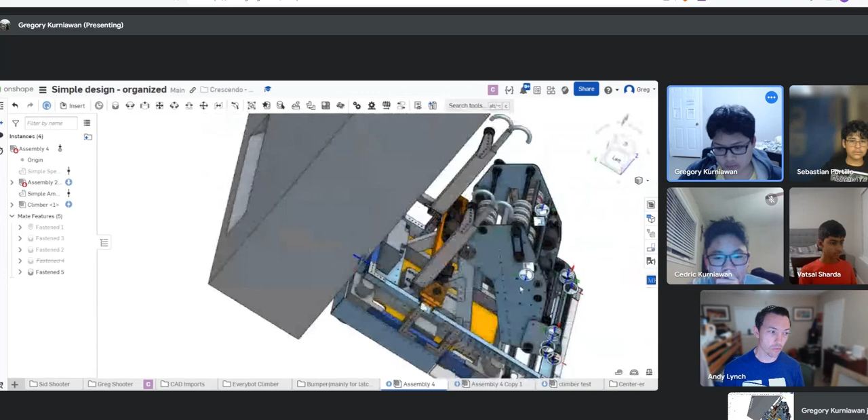I think so. Maybe bumpers, that's it. I did the bumpers thing on the assembly 4 copy 1, I just forgot to move it into my folder.

Okay yeah, give me a second, my computer's not happy with me. It's okay, the bumper stuff is in right now, it's just got most of the sections left. That's fine, yeah.

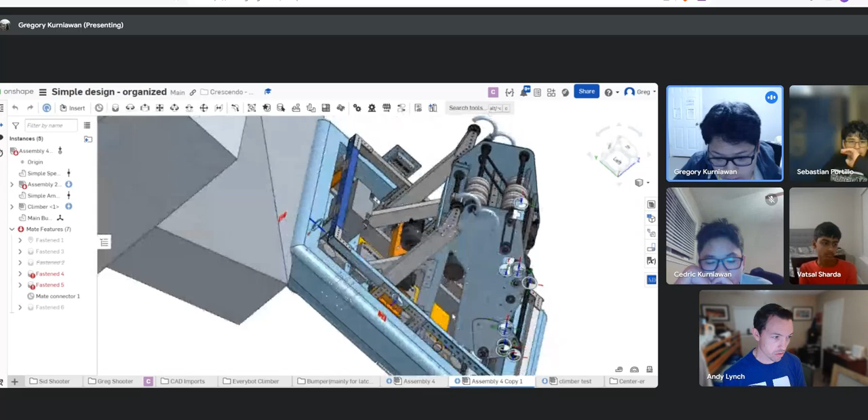I'm sure we can use this, it's okay, I think it imports everything too. That's fine, okay, here it is. Here's the fun part, okay.

I guess we'll start with the shooter. Well, we'll start with the intake because it's changed a little bit, the intake stuff. Okay, this one's easier to look at.

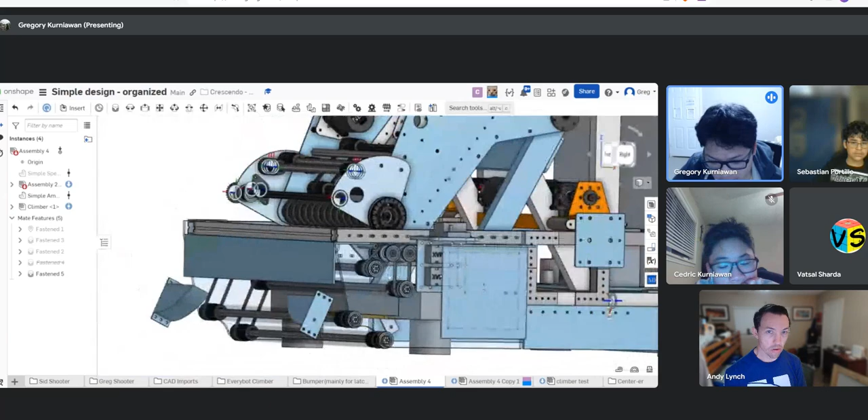So in order to accommodate the shooter, I moved the motor down a little bit. We had this CADed out already before, so we just moved it down, and there's a new plate, a new gearbox plate, and a new

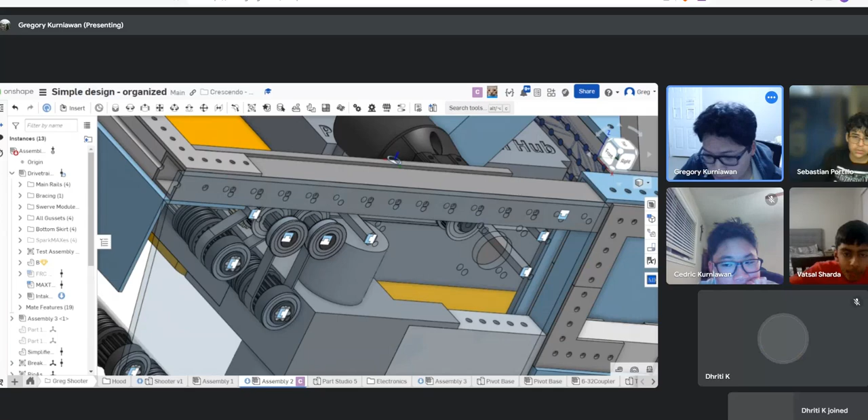intake plate. Actually, I think it's the same intake plate. Oh no, it's a different intake plate because of the different motor hole position and the different standoffs. This doesn't really need to be here though, so we can just use the old ones and put holes in it. If we want to, we just have to cut this part and this new part out.

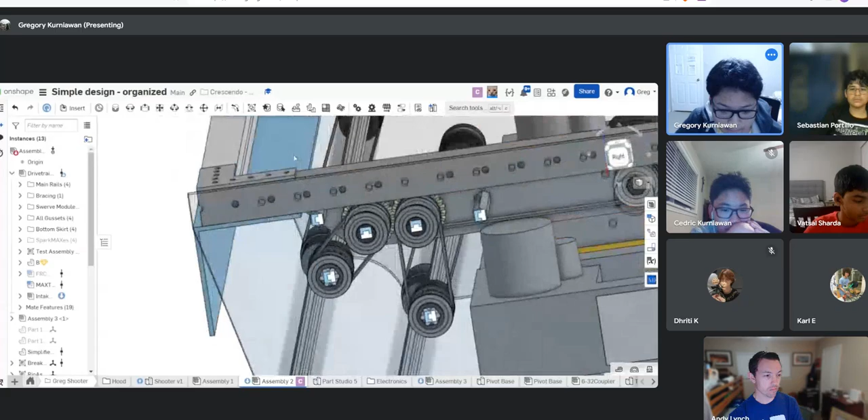Oh, I didn't catch this though. Yeah, and that's just to make the shooter part stuff work, because with the old intake, every time I tried to put the shooter in position it would always hit the motor no matter what. So yeah, no, it fits right in between there. Okay.

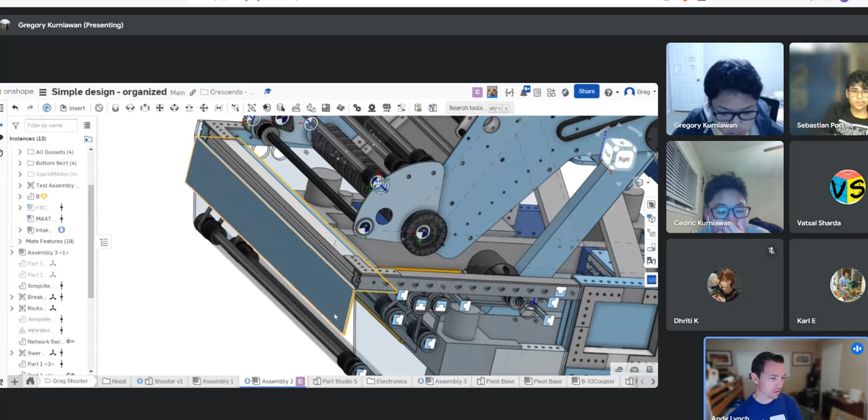Oh, did they? Because I don't think any of the pictures show a top down, so I didn't really know. I just kept it at 3x3. Let me see, let's look at it this way. We will, yeah, okay.

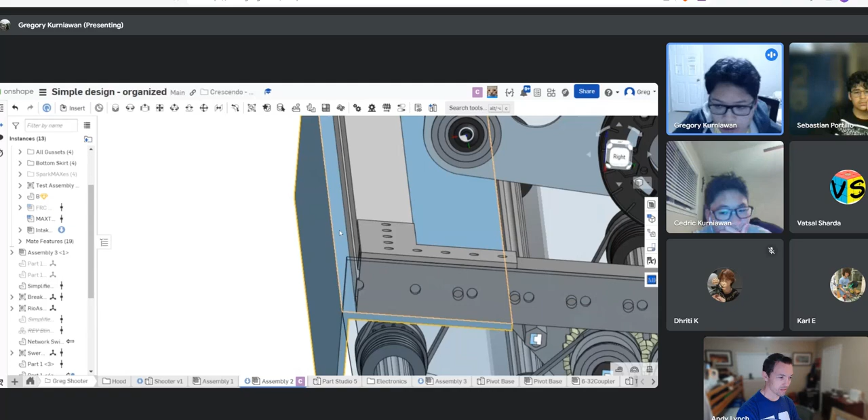Yeah, I think we went off of what we have for the intake part, we went off of what we have right now in terms of where we're putting the plate and stuff. We don't have to adjust that intake thing with the 3x3. Just got the 3x3, okay, yeah.

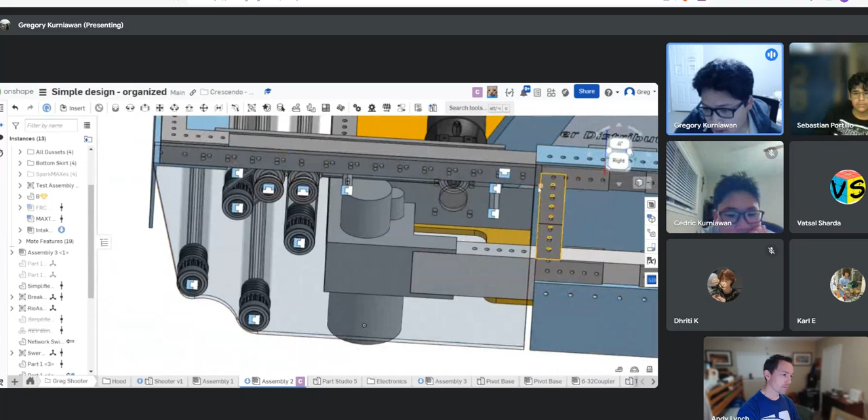Yeah, because the old one still has this gap, because the current drivetrain has this little gap here, right? So that's where we're at right now. We can always move it and change it and stuff, so it's fine.

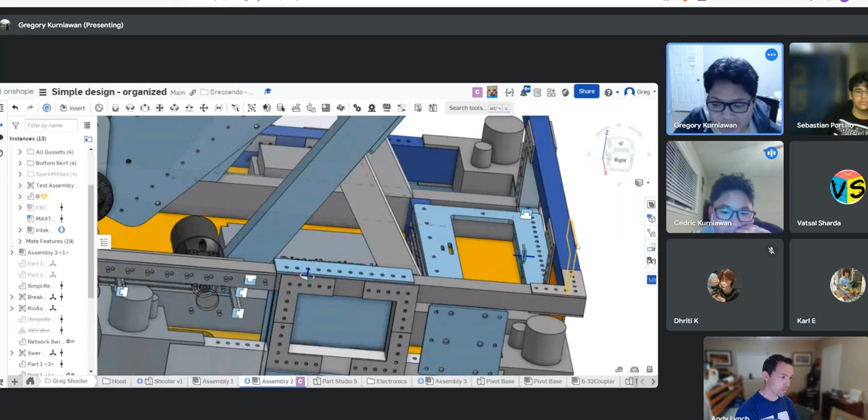Cedric, you going? You did other stuff, right? Yeah, I tried to make development on electronics. It hasn't been going great, truth be told, but essentially I didn't know that the navX was going to be on top of the Rio beforehand, but if you look on the plate to the side, that's what I think the mentors are trying to say about mounting the Rio to the side on a plate.

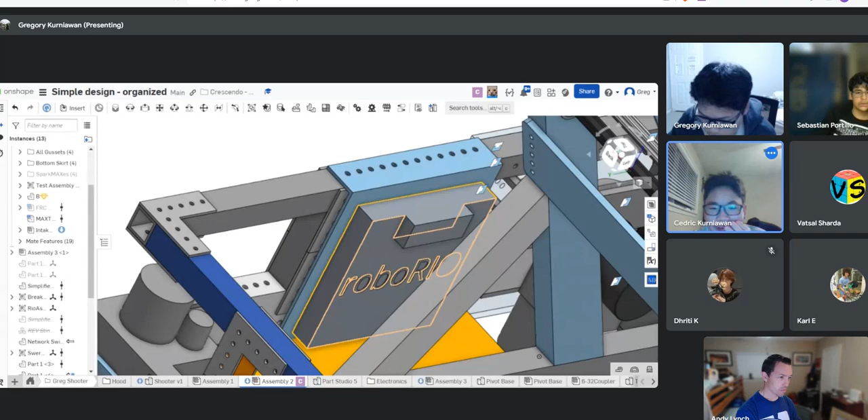So I tried to do that, but I was told that the navX was going to be on the Rio and it had to be flat, so this may be abandoned, but that's the current situation on that. And then with the rest of the electronics, I also made new motor mounts, Spark Max mounts for our drivetrain. That's the old one that's still in there, I haven't put them in yet.

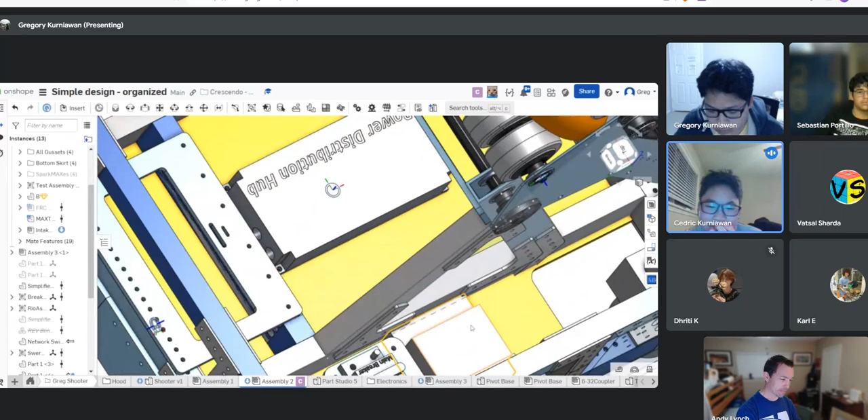I was struggling, okay, but yeah, those are aligned with the Max pattern, so it's gonna be easy to just screw in straight into the drive rails or wherever we need it really. And I'm thinking for electronics to either do it on the brace, like where that small little plate is, or put it on like the inside face of the bracing, like in the past. So yeah, but that's where my mind is at right now, but I haven't made a full-on decision yet, or 100%.

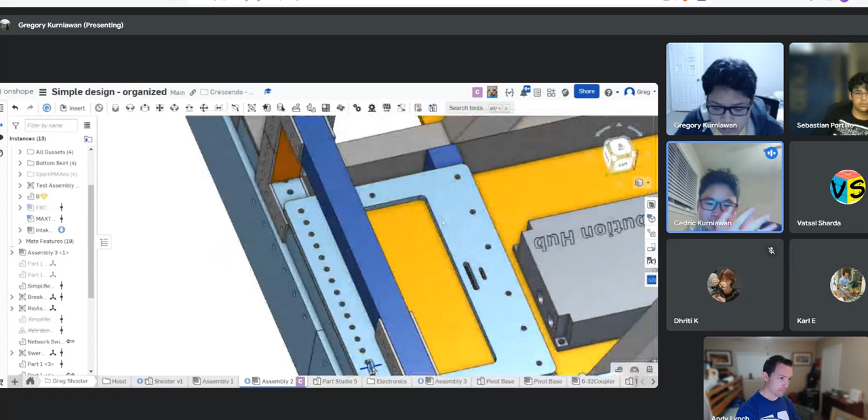I also did realize at this point I don't know why I went and designed and cut a whole battery mount where we could probably just use the AndyMark battery mount, considering we're using their whole strap system, we may as well just use their battery mount. So I also considered trying to do that.

You want to show it? If I can find it. Right now, okay. Okay, you're happy with the sketch? I mean, I think it's okay.

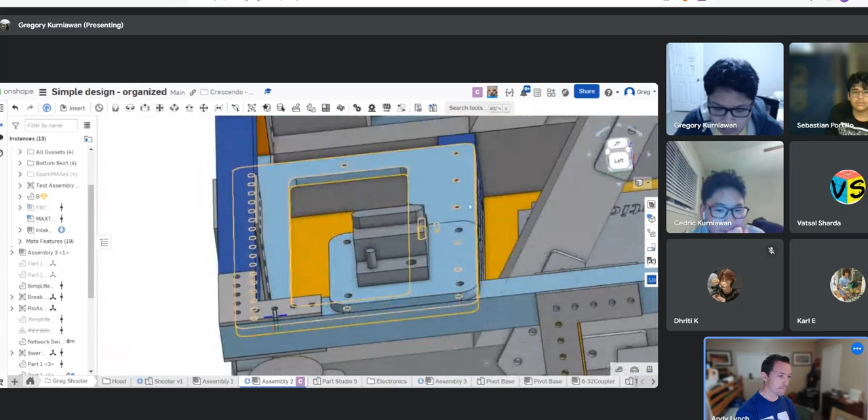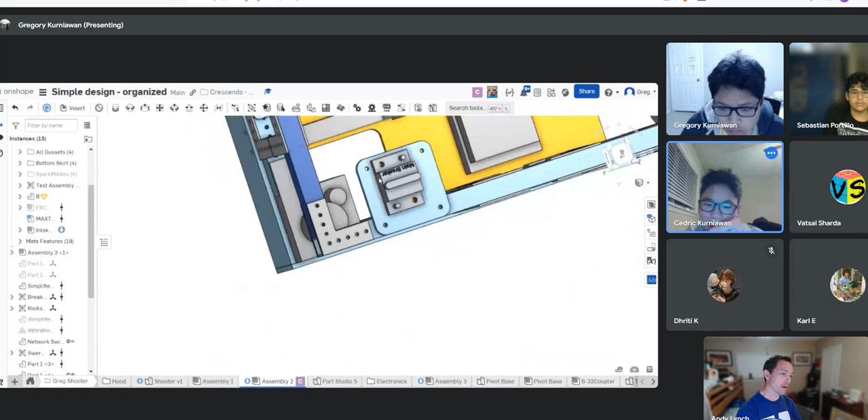That shouldn't be like a big issue, right? Yeah, yeah, okay, that's perfect.

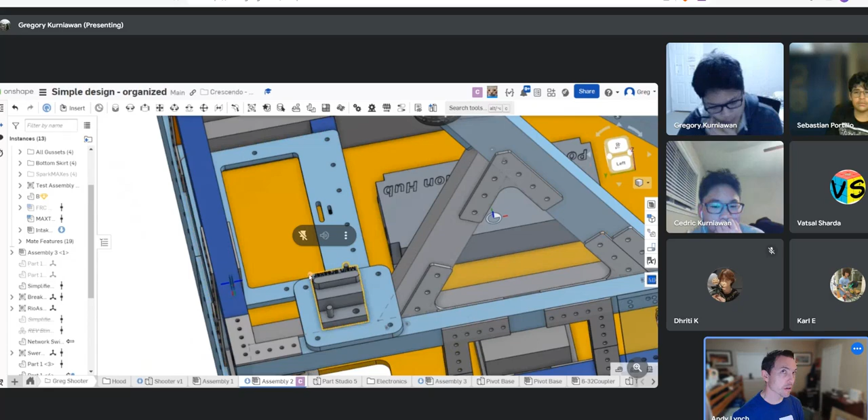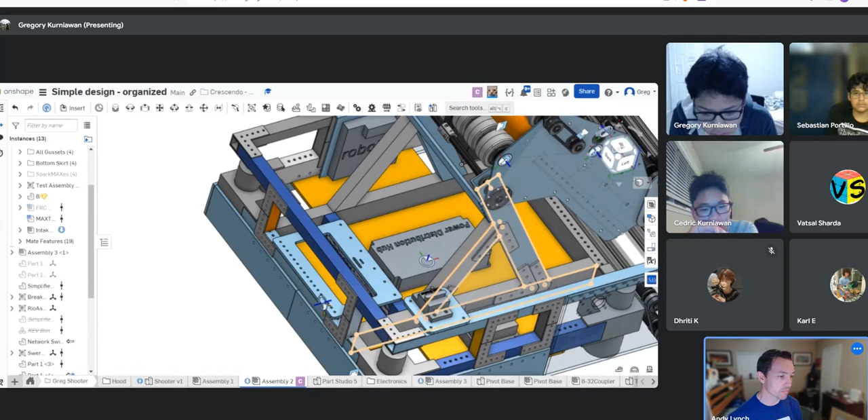But the PDP, do you think it's too close to the battery, or like the wire? Do you think it's gonna be able to bend, or should I move it back, give it more space? Because right now it's kind of tight, but I don't know. What you do is put it on Velcro and then move it around.

You know, right, yeah, okay.

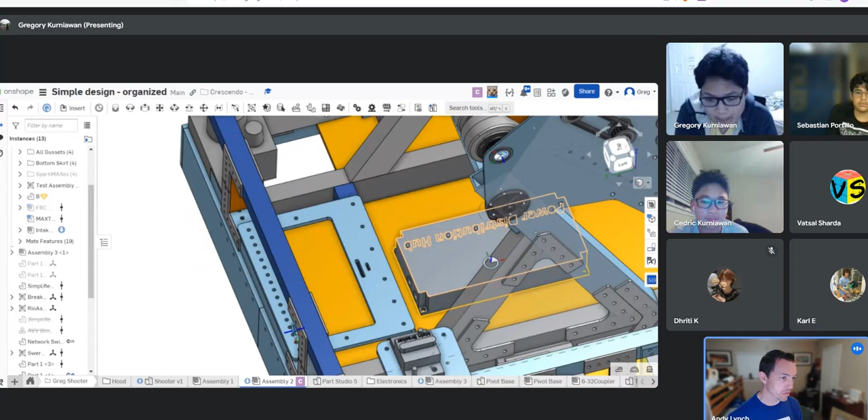Side to side, it should stay the same. It's just a matter of how close to the battery we want it to go, or stuff like that.

The timer. Other assembly, one second.

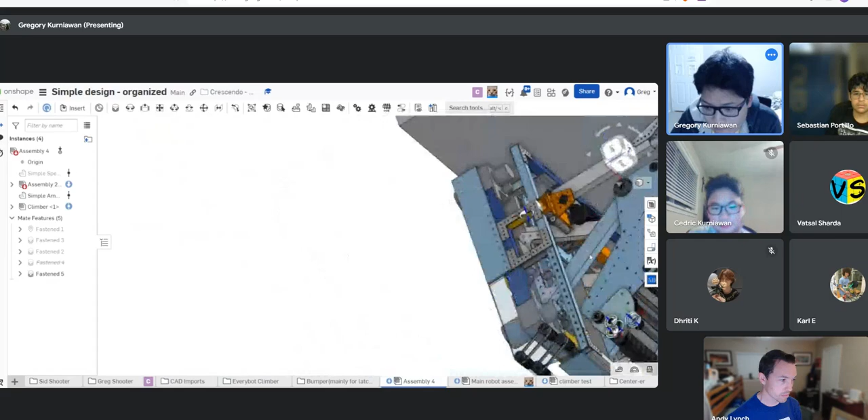This thing. You have a problem. There you go. Yeah.

There's a climber right now. Vatsal. Move it.

I don't think so. Oh, this was put here before the A-frame was there. Like, we can move it.

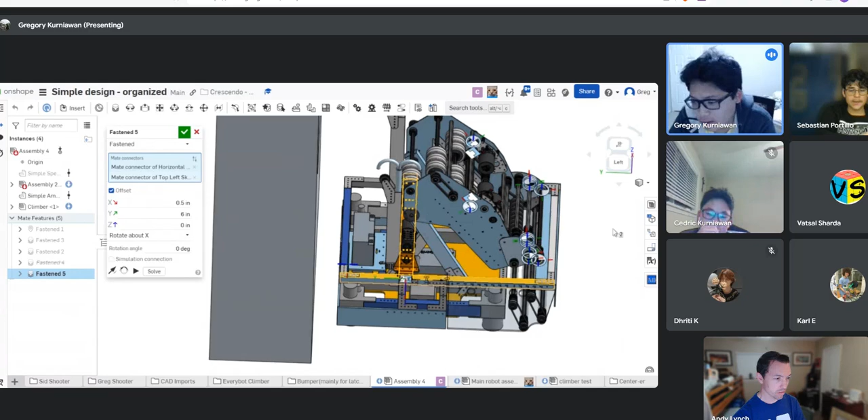It is a balance. I'm not sure where the balance is on this robot. I think it's more on the backside, right? You know what I mean? I guess it really doesn't even matter too much, right?

If we're leaning forward, as long as we're not leaning so far forward. Yeah, we have to- it's gonna try, and the robot's gonna try and turn, and as long as it doesn't turn too much, we should be fine.

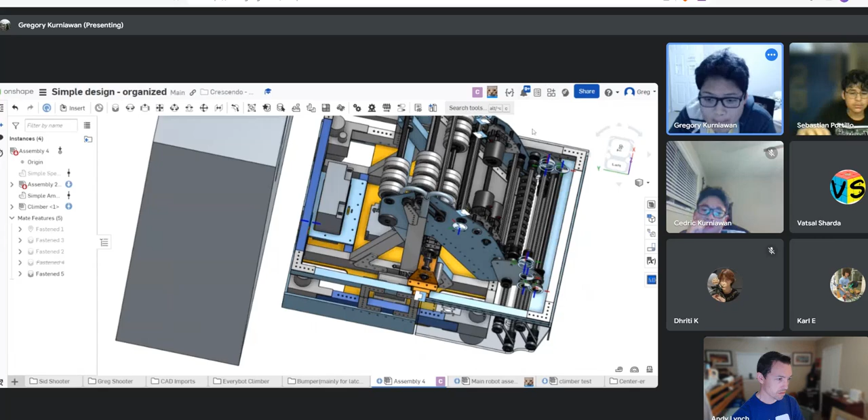So you create a pendulum basically when we hang on the chain. We could put it in front too.

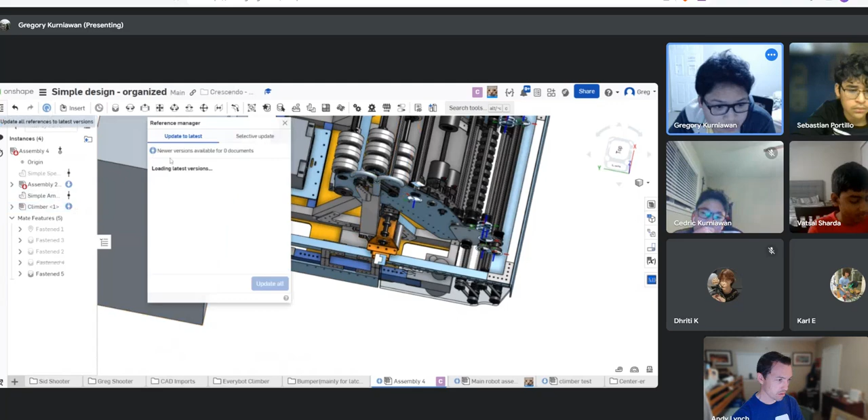Yeah, we could. It'd look a lot- I'd be careful with the front though. That seems like a lot of turning. Here, I think that's on my new version.

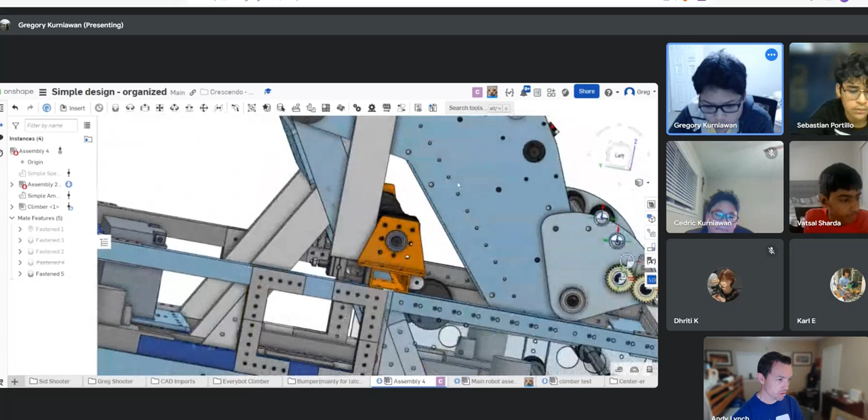Yeah, this hits a lot. You have all the intake stuff in there, so it's gonna be tight. Yeah, it's all gonna be really tight. Let's try and move it more.

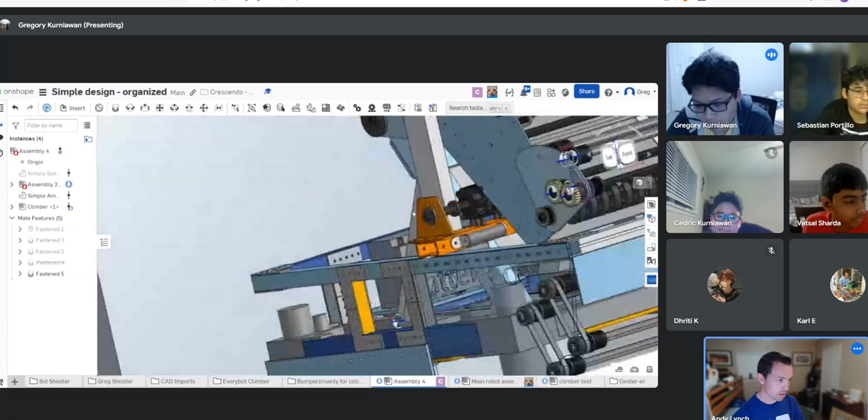We could just flip it so the motors are on the other side. Maybe, oh yeah, we could. Actually, yeah, we could. This looks like it doesn't- this looks like it fits right now. Except this- no, I think it looks like all of it fits right now, where it is. Oh, I mean this right.

And the shooter pivots, so in theory we could just rotate the shooter.

Yeah, I think this is more of a CG question. Do you put it in front or you put it in the back? So yeah, you might need to.

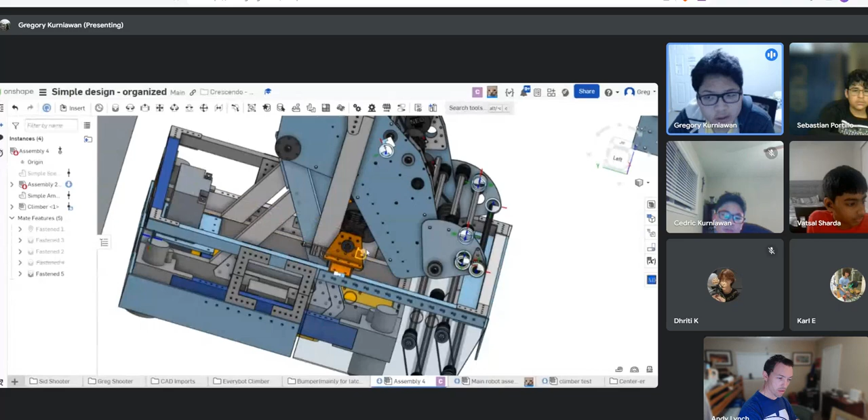Most of our stuff is near the back, so I'm not sure. It probably is better on the back. Because I guess you put it as close to the CG as possible, right? So you want it closer to the back.

It's also gonna make the back heavier too if you put it closer to the back. So that's funny. All right, that's interesting. Yeah.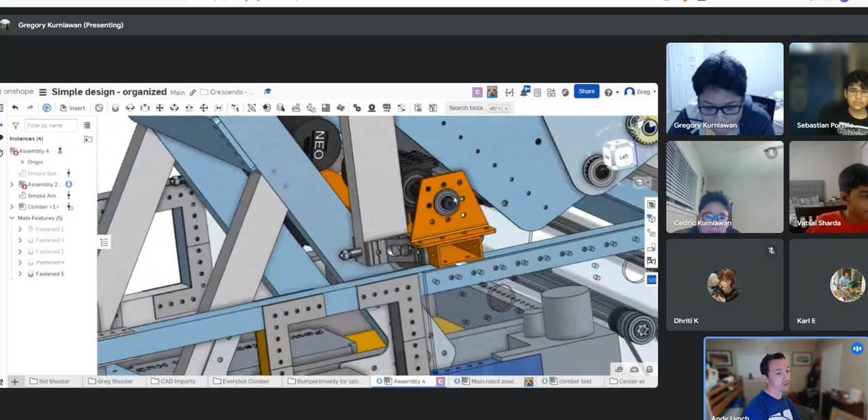From working on electronics wise, this is a pretty good position, I think. So we can still get our hands in there and work on electrical stuff. Yeah, this whole front part's open.

Could we put the climber underneath the skirt if it's having conflicts? Underneath the- oh, I see what you mean. Like put the- let me move the... actually, no, part of it.

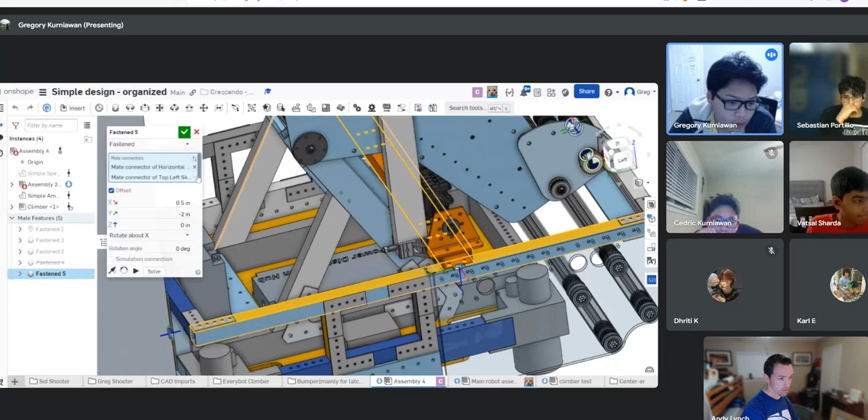Maybe- I think this thing is... this is what you're talking about. Something like this. Like, sure, there you go, something like that. Right, yeah.

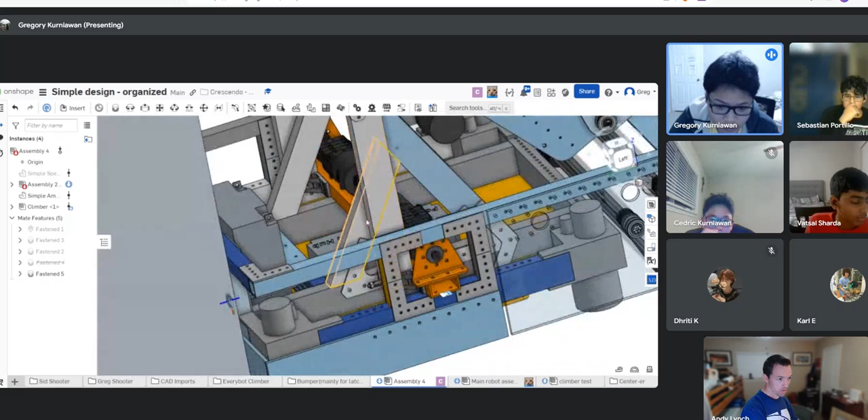I don't think you can go any more forward, so I think it's probably where you end up. This is not a bad place either. Oh, it's kind of annoying for electronics though.

Oh yeah, but I guess we don't need this full beam here, right? We can cut half of it. Yeah, I think you do want that cross brace to it. Oh shoot, so it comes in- depending on how it ties into the super structure. Yep.

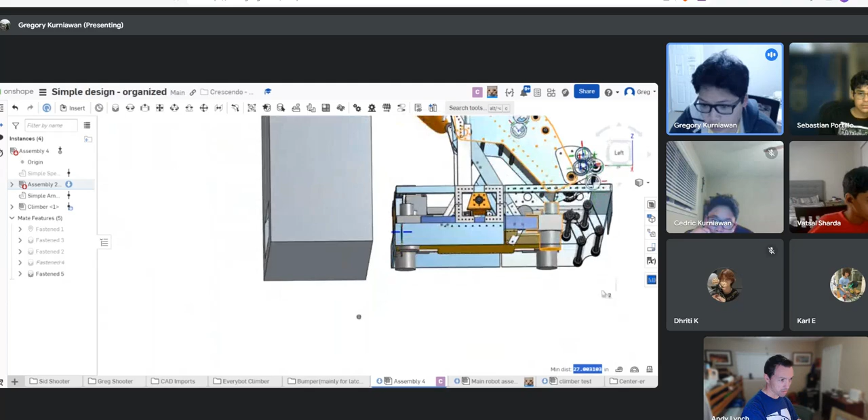It's definitely a lot lower. We need to go higher with the climber to do that though. It's good, right? Yeah, we could. It's based on how far this is, how long this is—this 2x1.

I made it a variable so we can easily change it. Okay, good. We have to do the math on like if it will reach, I guess.

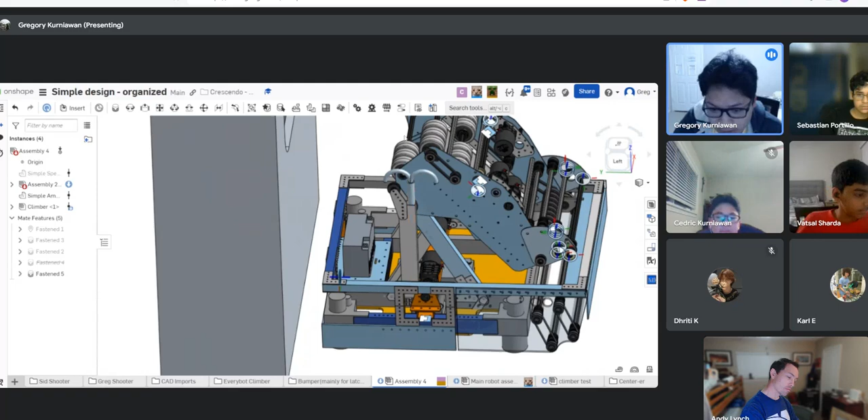The reason I like this a little better, if we can put it all in, is the bumper skirt is a little more unstable the way we have it currently. If we use drivetrain rails, it's going to be a lot more stable. Yeah.

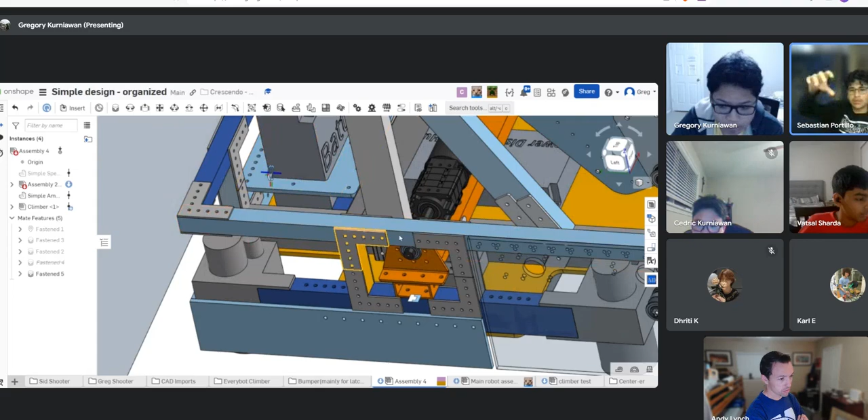It does take up places we could put mounts on though, that's the only thing. I'm not sure if you're gonna put a mount here. Sebastian, I honestly think it'll just be better if we just put mounts on the top skirt, it'll be a lot more accessible. I'm just not sure your bumper will reach the top skirt, right? That's the only part of concern.

Oh, like bumper mounts? Yeah. Right, I haven't figured out placements. I might just scrap the idea of having a bumper latch, and I might just drill through the skirt, like the polycarb skirt from the top. We could put screws through there.

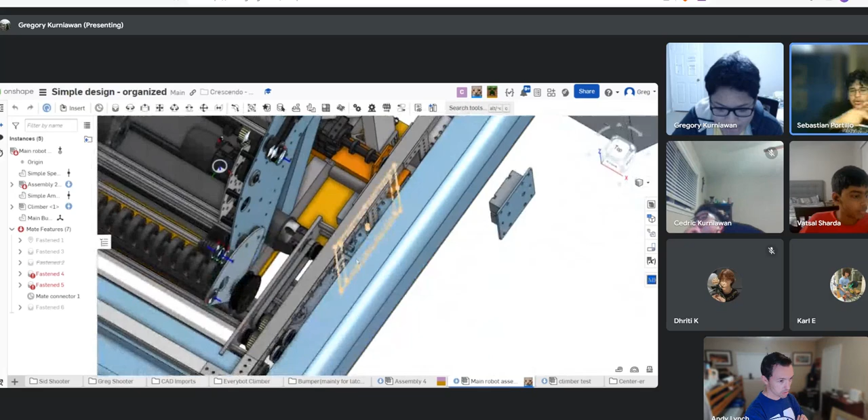You can't use the polycarb skirt, but you can use the metal stuff. Yeah, there's a rule in there somewhere, I remember that being a thing. I think because this isn't—it says like solid plastic, you can't use it as a mount for your bumpers or something. So be careful about that.

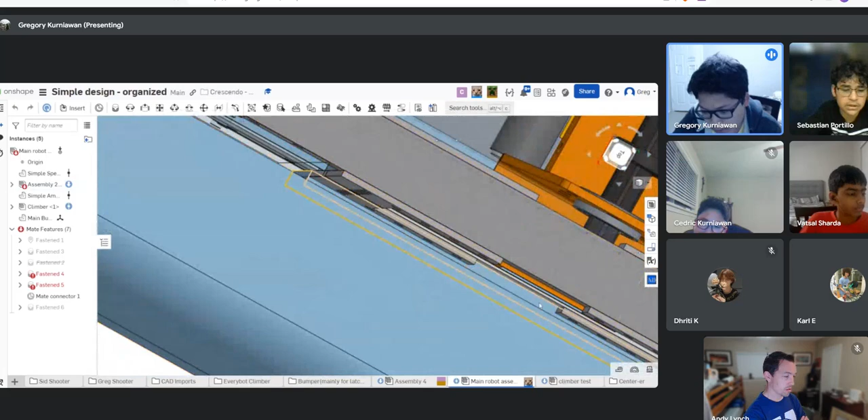But metal stuff, any metal stuff is fair game. Like your brackets could go here, for example. You see the brackets you were showing in the channel could go right here. Yeah, I think something like that.

So one thing about the brackets, I was looking at the drawing, and I don't think they line up with the holes in the robot. I can send you the drawing. Okay, yeah, I remember looking at that too and being confused because the holes aren't like the 0.5 that we want them to be.

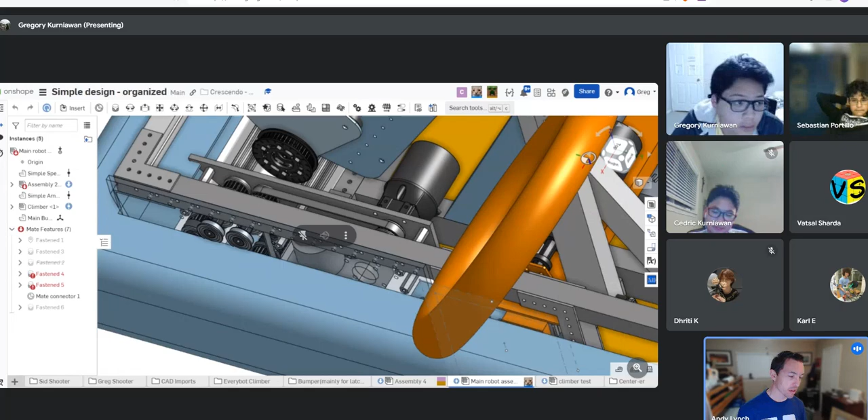I mean, those things could be replaced with like L channel, so don't worry about that part.

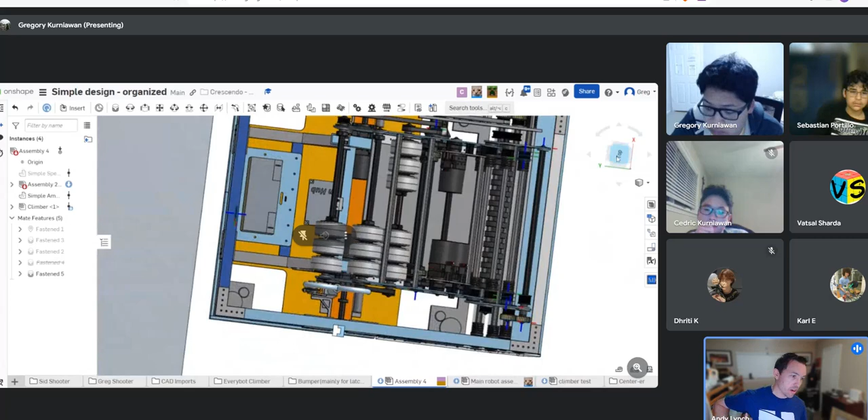I think getting this climber positioning is going to be very important, Greg. So you need to stare at this a little bit, and if you're happy with putting it in there and how well it tucks in, I'm okay with doing it right there in between the A-frame. Make sure everything's happy with the way you have your motor pivot and stuff. The shooter stuff too, that's the only other thing I'm concerned about.

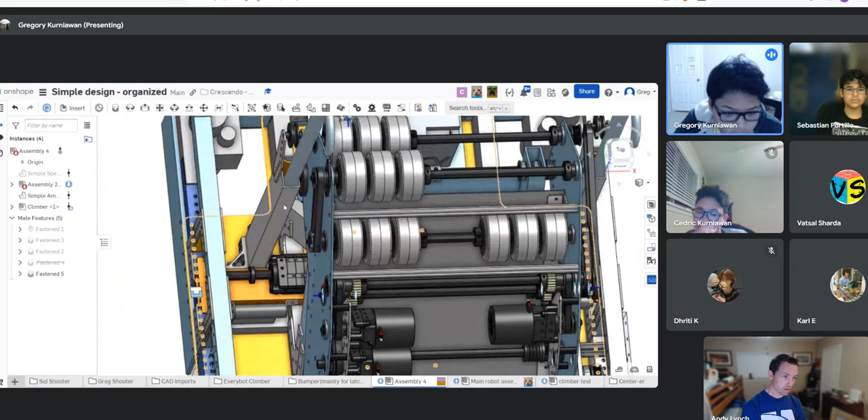All the shooter stuff isn't—it might interfere with the climber hook, with the 2x1s here. It seems like we can move them all, I don't know why they're so... they could go further to the edge. Yeah, I think it's because of these. Vatsal, I think you need to make this outer part more compact.

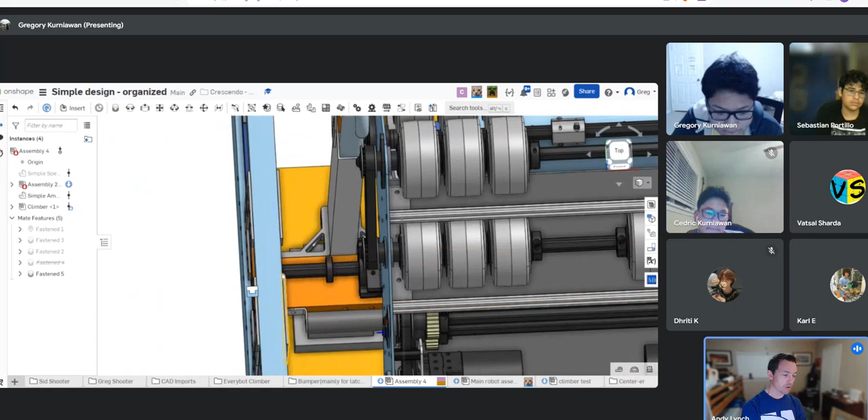Well, we have a bumper skirt here, right? So you could shift them all the way over to the bumper skirt, and use the inside of the bumper skirt to secure them, instead of just that one. So I should remove the right bracket, and then I can just secure the thingy with the skirt, right? Yeah, should be able to.

Alright, if it all fits into the system, yeah, I think that's fine for me. Yeah, it should work, just be careful on how you're attaching these 2x1s. Like for example, we can't run long screws—we can't block this PVC tube from going up. And if you want, you could put a little angle off the bumper skirt.

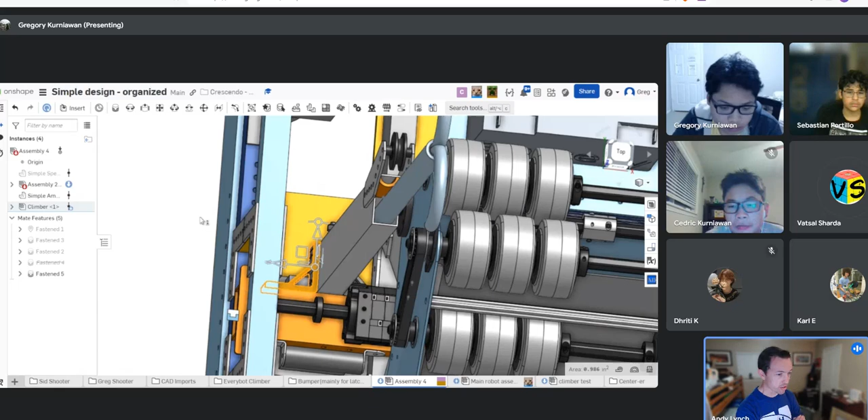Alright, good. There's lots of ways to do it. I think it's more of a conflict with the shooter stuff, but we need to space that out a little bit. Should I mount it on the gusset, or is it fine if it's on the rail?

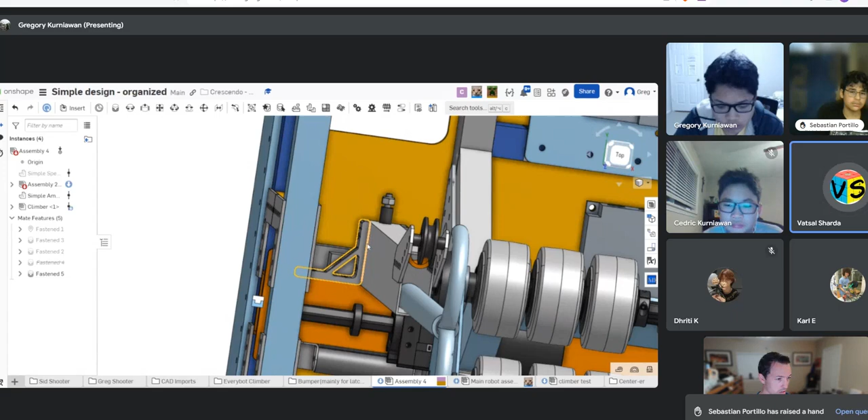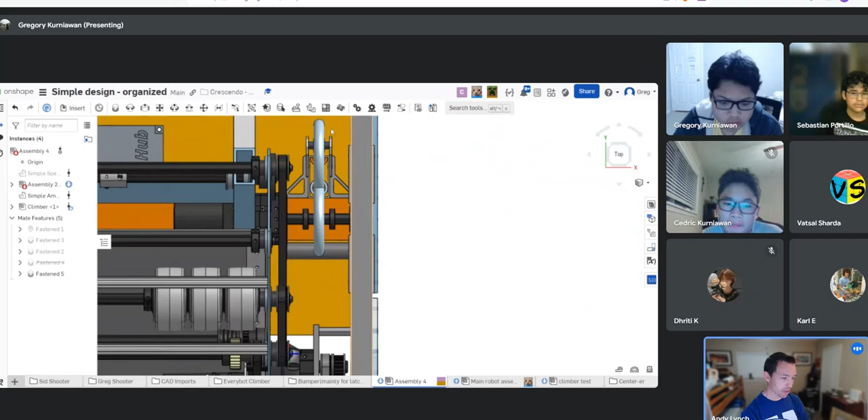On the skirt, you can do it straight to the rail, I think. Then we'll have to move it back or forward a bit. Won't we have to move it backwards a bit for that? How about this, guys - we just need to generally put it in that area, to get it out of the way of Greg's shooter stuff, so he can finalize the shooter stuff, and then the climber will fit somewhere in that space between the bumper skirt and where it is right now. We'll give a little more clearance to where it is.

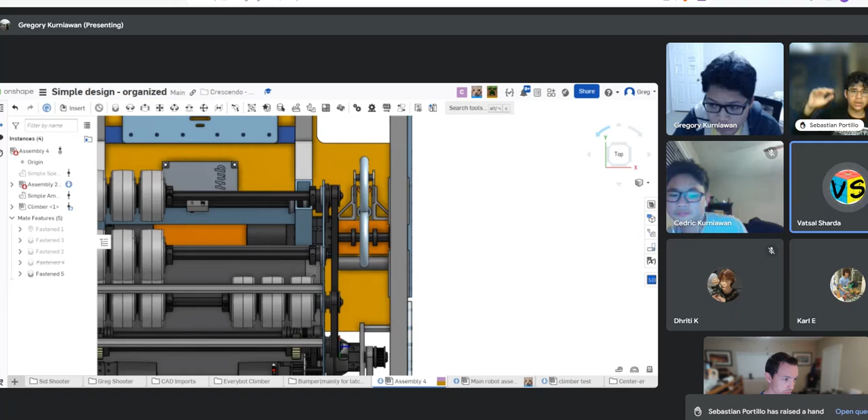One concern about that is if it's too close to the side, it could get hit, because PVC is like plastic, and if we get hit from the side, it could break, and we could lose our thing - the climber. Yeah, because if we get hit like a solid hit from a tank drive, it could break, I think.

Think about how people would hit us - they'd have to get inside. So that would need some mechanism that goes through our bumpers and into ours. It could happen. And if they do, they shouldn't be hitting us when we're bumping.

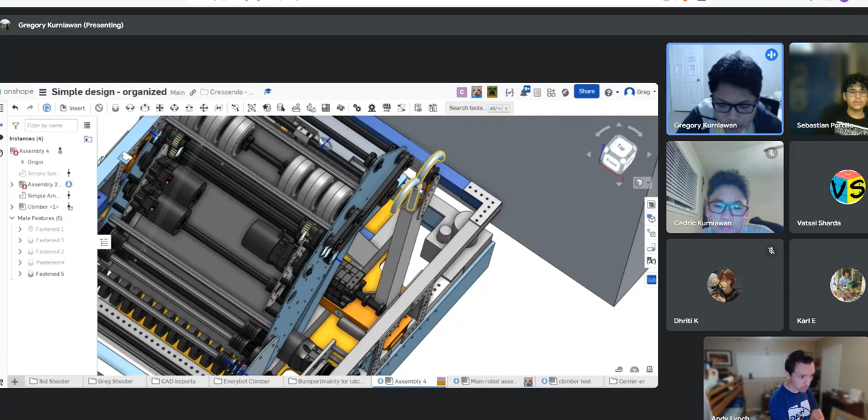Yeah, during the climb portion where the PVC is the most exposed, they shouldn't be hitting. We'd be like 100% protected, pretty much, unless they go super rogue. I think in the rules, if they just even bump us, not just bump our thing, it's a huge penalty and points for us.

It's a valid point, I just don't think it's going to happen very much. If it does, I mean, we get hit a lot, and we do our best to just not spare it. Okay.

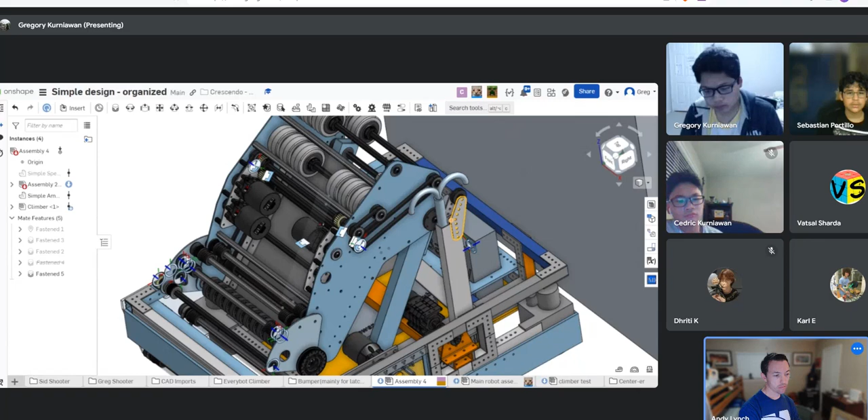I'm okay with most of this. I don't know if we really need the rev gearbox - is that what we have, a max planetary there? Yeah. I don't know if we've done a lot of max planetary, so I'm not sure if we have all the right pieces. You guys used that over the summer, right? Yeah, we got a lot more too. I think we have some, I don't know how many exactly.

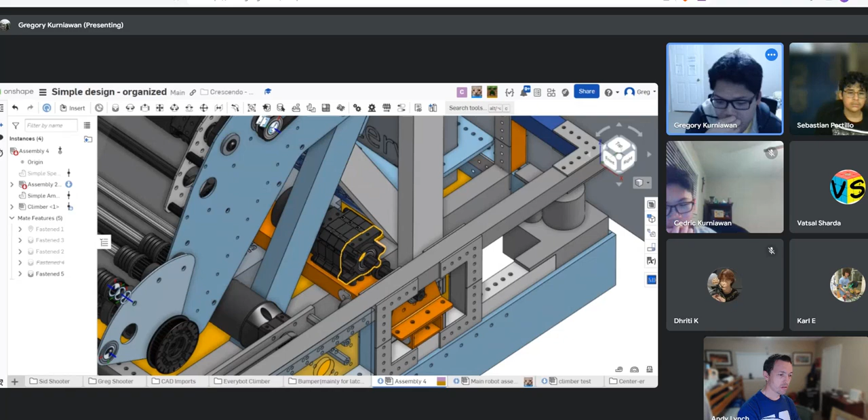It's a motor with a hex shaft, so the idea should be the same. I think the Everybot one also has stuff for Versa - pretty sure it's the same. So there's 3 or 4 different options we can use, and it looks like we have plenty of space if it needs to be longer or shorter. I think the mounting pattern should be the same, though I'm not 100% sure for Versa and Max.

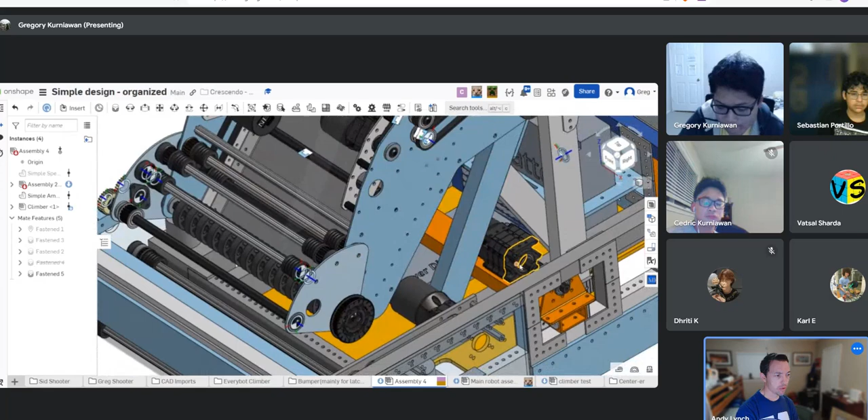So have you thought about how this thing is going to pivot when we talk about it next? I put it there - I was thinking a big sprocket and a chain, as usual.

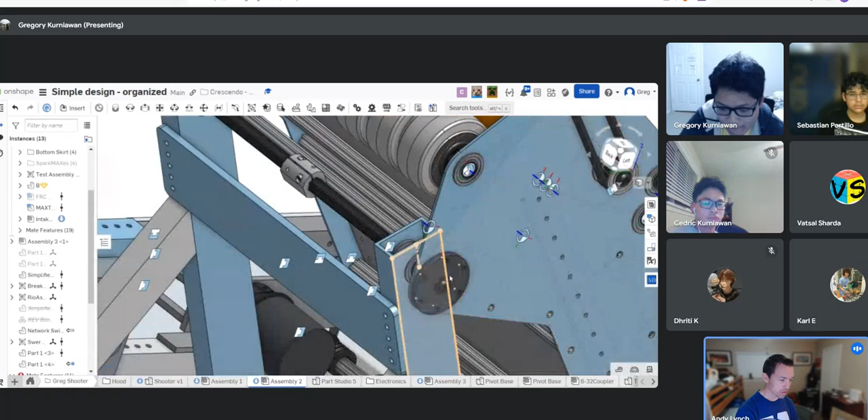That's probably the idea, but that plate needs to be moved. See where you have that off? That's what's after your sprocket. It's either that, or if it fits inside of here - I'm not sure yet, I was looking at the hood just now.

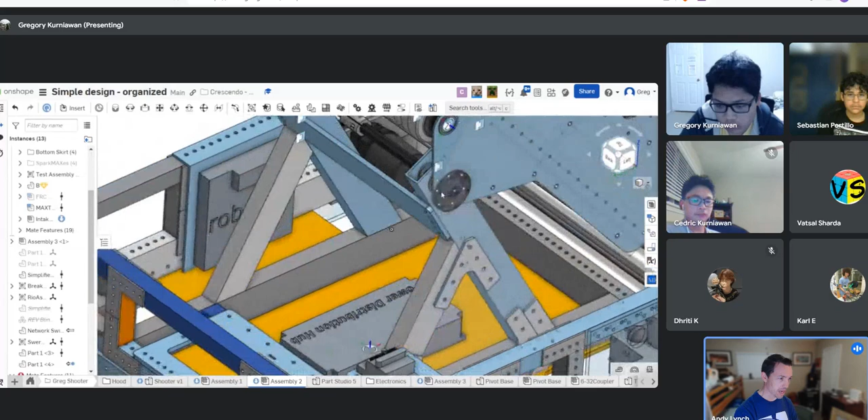So that plate is going to give you some conflict. You likely want to go bigger than that in terms of the pattern. If you throw a big sprocket on, you might want to make your shooter plates a little bigger. Spend the time thinking about how you want to do the motor, chain, and sprockets, because it looks like it could conflict.

I have to think more about that - I was working on the hood just now. That one's a weird mechanism. Not even worried about the hood right now, I'm more worried about getting all the package in, because we can mess around with the hood later.

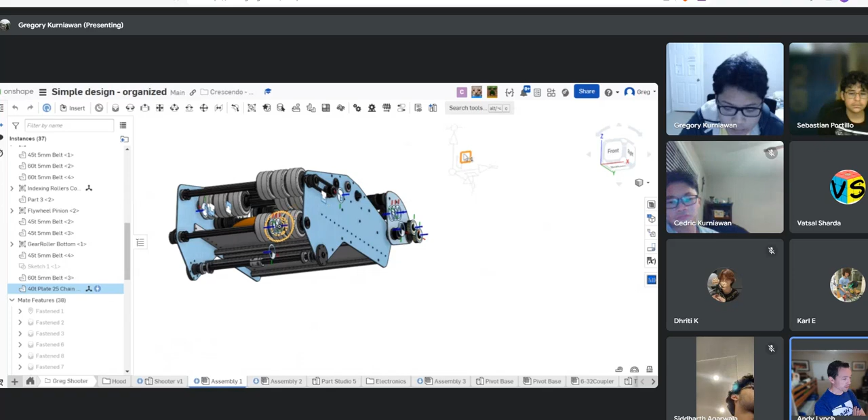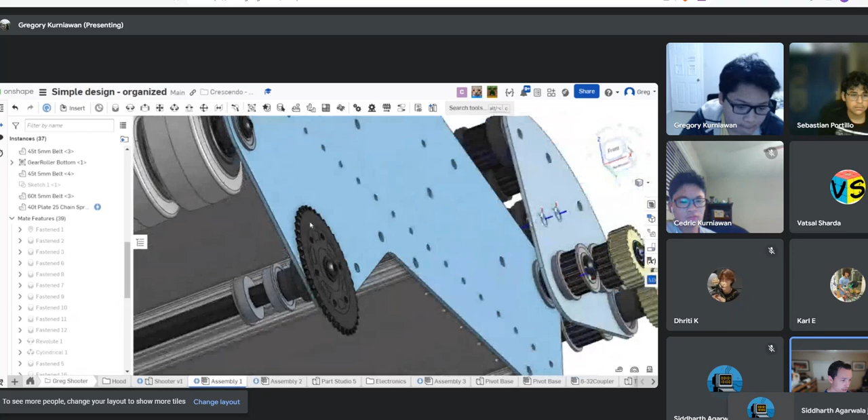This climber pivot, once you kind of set it, that's kind of it - bigger, something like that, or even bigger. And I think that shows you how this is going to be a lot bigger. Yeah, a lot of teams go with much bigger sprockets, so you might want to experiment just to see how it all looks.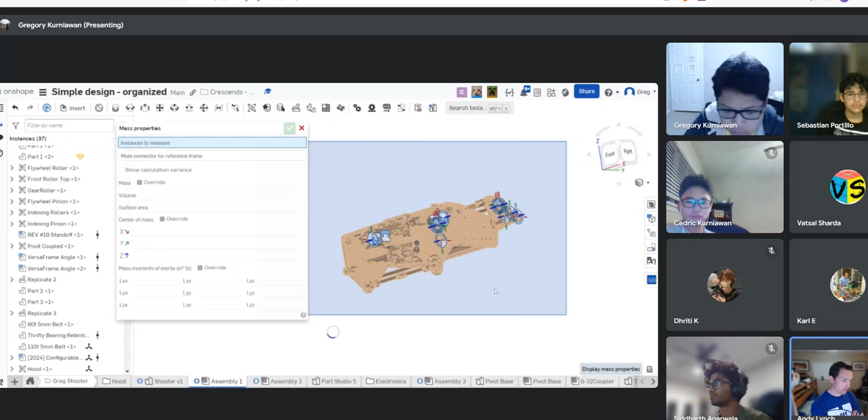I guess we're not putting anything huge in this, but it doesn't have to be - go through the process of mocking your motor up based on where your chain is going to go, and make sure you have plenty of room to secure the chain. Because it's going to be in the same area, probably - well, it doesn't necessarily have to move, the chain can move around. So it doesn't necessarily have to be in the center.

Maybe that's how we put stuff in the back. That's true, yeah.

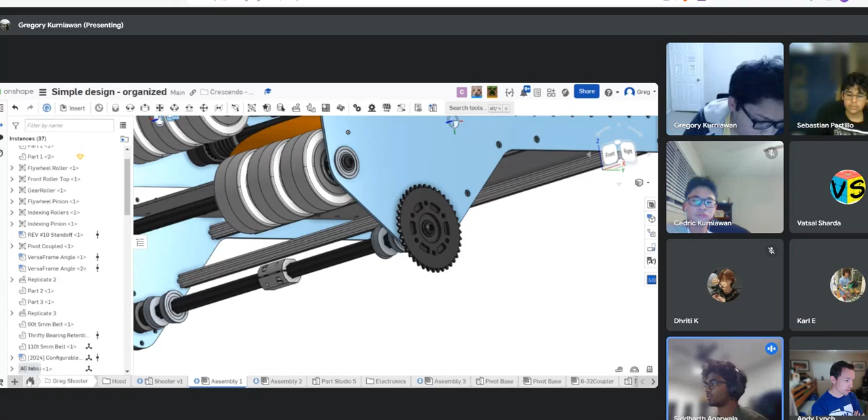Also, your battery. We can always run the chain twice, like have one chain run from the motor and then one chain run up from the motor to the thing if we need to clear stuff. Yeah, we put a gearbox. I mean, we can put a gearbox there, I guess.

Oh yeah, the nice thing about this robot is the electronics will be out in the open, pretty much, either side you put them. Both sides should be open, I think, for putting electronics there, or just working on electronics. If you wanted to, you could even put the motor on the A-frame.

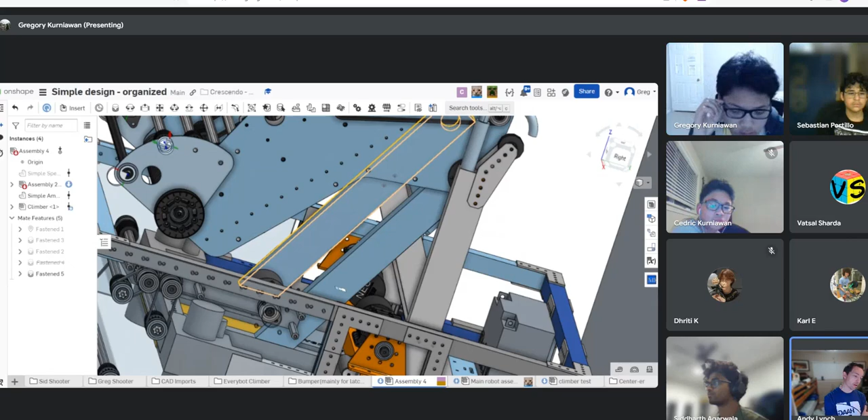Run the chain, oh like the Everybot one last year with the 90. See where your gray part of your A-frame is? Put like a 2x1, similar to the way the primary motors are, put all on the A-frame itself, and then run the chain up to it. Yeah, that could work, I just have to think about it more.

Yeah, just think a little bit about access. We don't want to make it so low that we think it's garbage. It's low. Right.

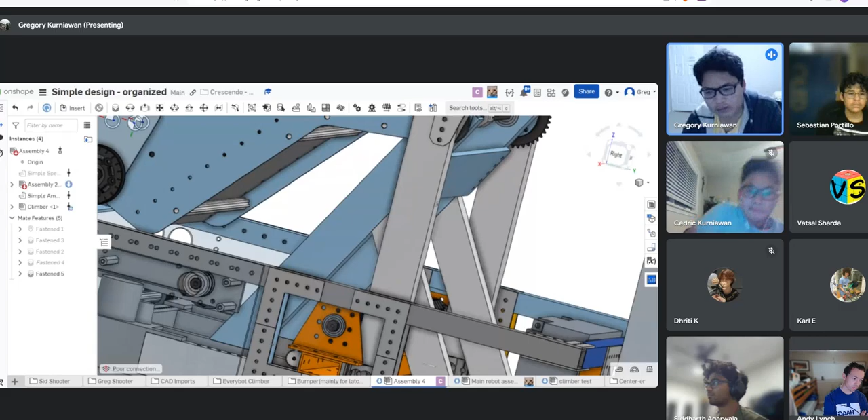Are we happy with this A-frame, by the way? So it's 60s. Yeah, I'm not making custom gussets, I don't care. Everything I'm going with is either standard, something you can buy from like Rev. Does Thrifty Bot make angle gussets? I'm not sure, but somebody. I think we have a variety of them too, so we can put them once we have. Yeah, I think you bought some. Okay.

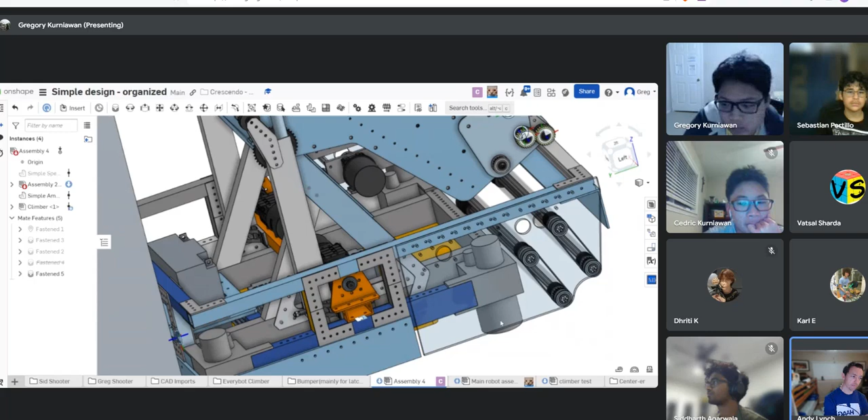Yeah, I think we're really close. I mean, I think it's time for you to just, for conflicts, be happy with it, and share these screenshots with everybody and see if anyone has issues with it. Maybe Sid, it's time for you to just dig through and find problems. So we can. Sure, yeah.

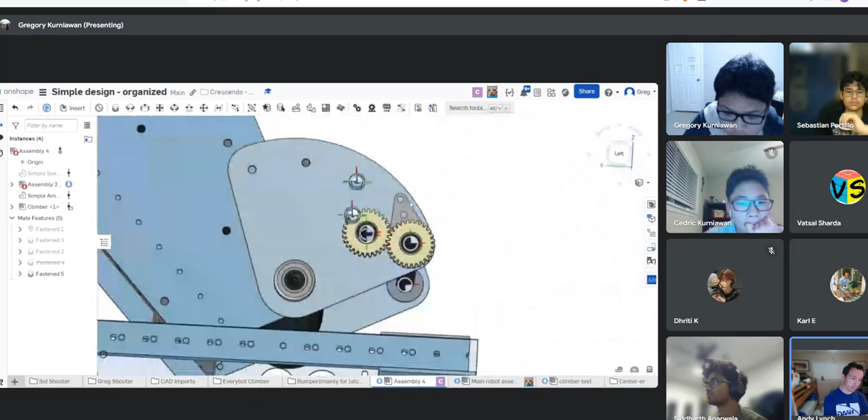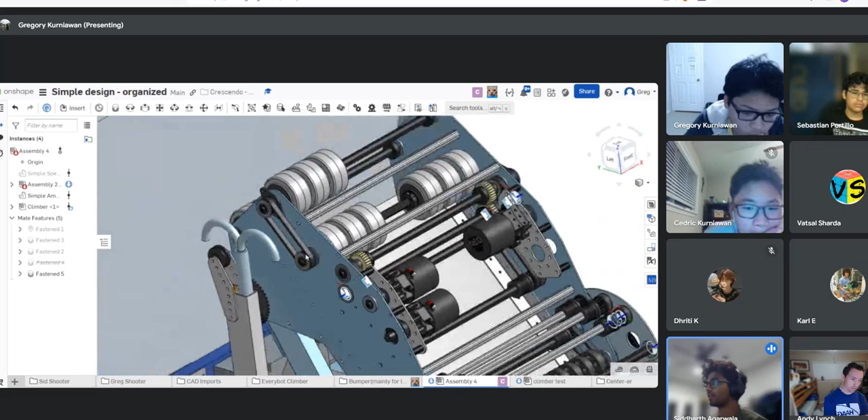I think the biggest thing I'm worried about, just looking at it, if you could zoom out Greg, are these exposed belt runs on the outsides of the shooter? I've seen plenty of belts fly off shooters after people take hits inside their frame perimeter, because that happened to Paradox at TRI 2 years ago. I clearly remember them having a belt fly off their shooter every match. Yeah, I think that's like a simple fix.

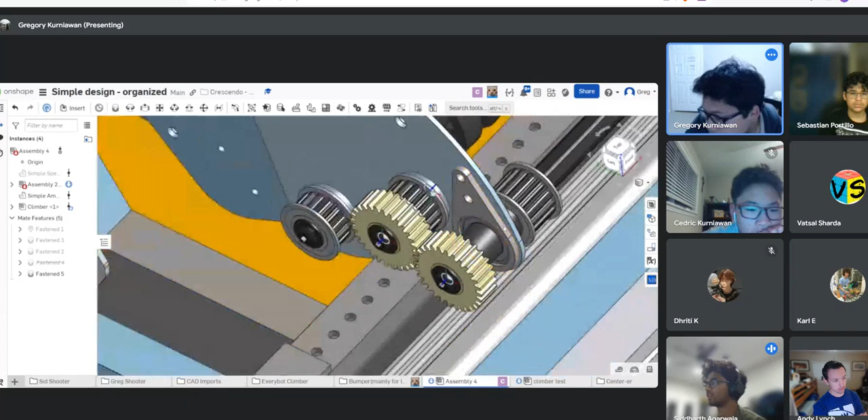And then if you go back down to the hood, there's a cantilevered shaft. Oh yeah, I don't like this one. This is how Vector's doing it, and I don't like it. I think just stick another plate on the side. Yeah, I think I already made one too. So I'll just put one on this side, right? Put standoffs on it or something. Yeah, okay, Vector's really doing it like that, okay.

I had the same reaction. What? Keep in mind, Vector is still very much a CAD. They are not the same.

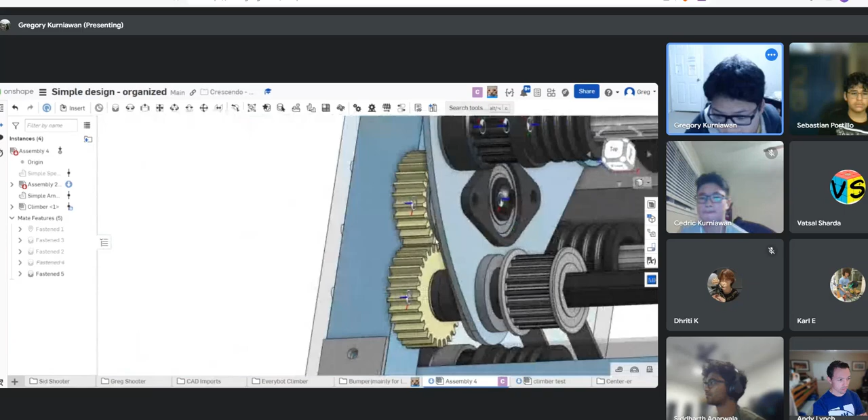Yeah, this thing's just a lot of little details, and I can't say that I've confirmed everything, but I think you guys just need to really dig into it. Simplify.

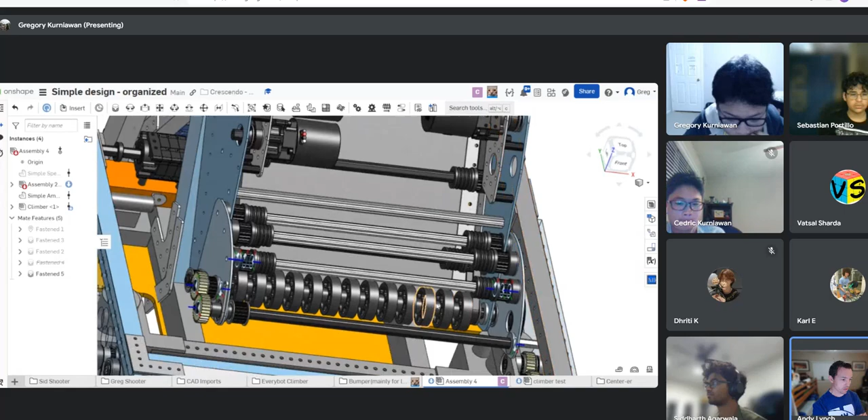The handoff is the concerning part. You really need to test that to make sure that the note comes out and inserts in the shooter. So I need to change the shooter design. Yeah, so if we could test that at a fixed angle.

Yeah, these squish wheels here try to make sure it kind of goes in, but I'm not sure. No, nothing is like 100% perfect. In Panther bots, they have a much bigger squish. Yeah, I just used the thrifty ones just because I know that's what them, like we have. Yeah, so it's also used as a shooter, like it's also used as the hood axle thing, so I had to use that one.

So I think one thing to change is that we could add guides to constrain the shooter, like the intake path to the shooter a little.